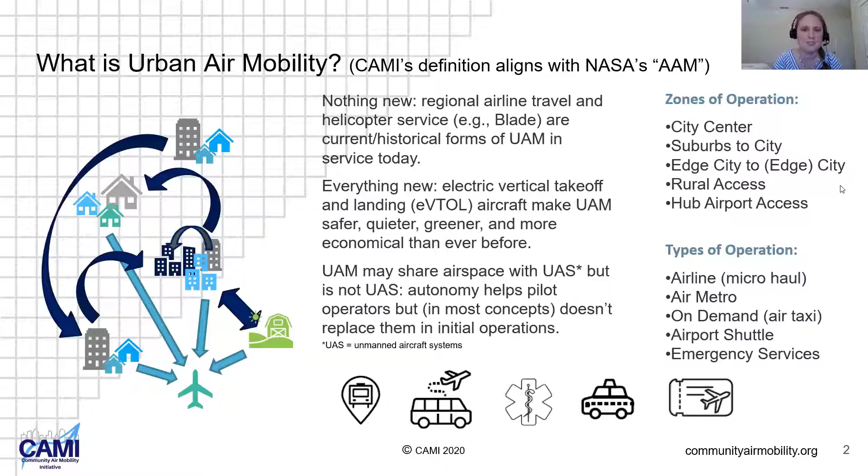So why is this different? Well, today's aviation industry operates separately from other forms of transportation. Back in the day when we could go places, we were very familiar with arriving at an airport, exiting your ground transportation, and entering this whole separate system. You're either on the other side of security or on the other side of the fence. You're definitely not integrated into the transportation networks we have available on a daily basis. Ground traffic is restricted, controlled, something apart.

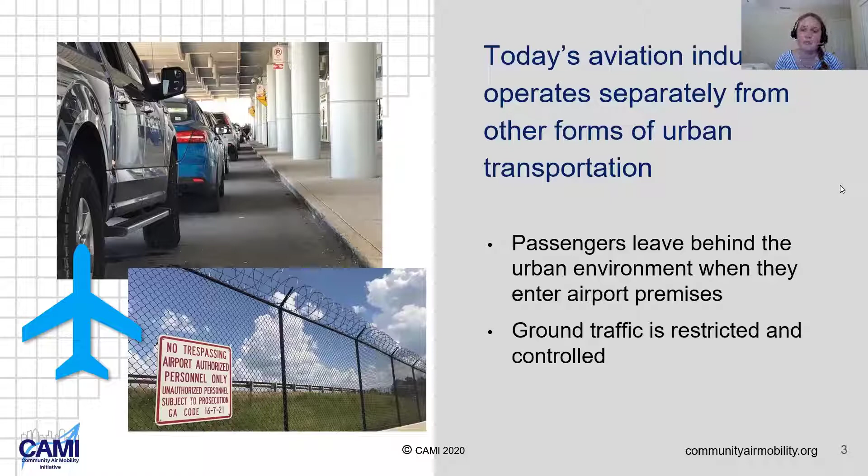Urban air mobility is turning that concept on its head. It's saying we want to take aviation, take that third dimension, and integrate it into our daily transportation needs. We want that as a solution we can use on a regular basis to get places we regularly go. This means we also have to figure out how to integrate it into the challenges we face in those other modes of transportation - congestion, urban sprawl, environmental impacts, noise - all of those things have to be addressed, and addressed well and proactively.

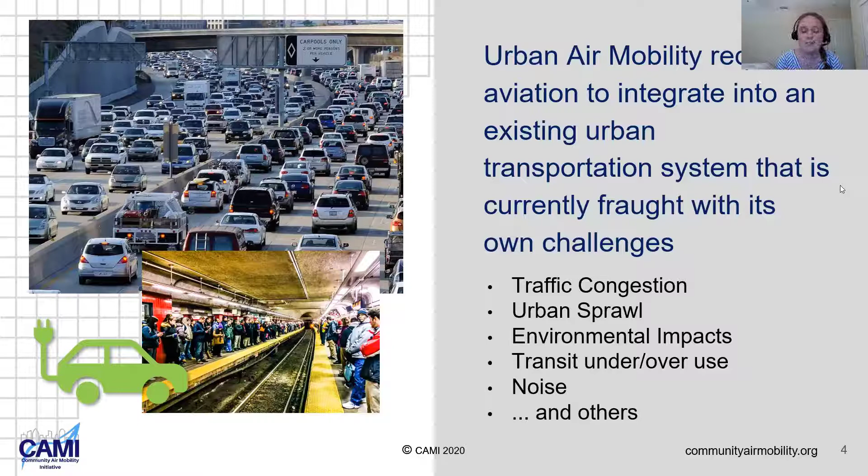Ideally, we would be integrating this new transportation technique into the existing transit systems that we've already invested in as communities. To do this requires bringing in a group of folks into the conversation that have not yet really been part of it, and I think that's probably a shame. So we've got the federal level, we've got the FAA, but we really need to focus at the state and local level.

We need to support DOTs, we need to support municipalities, and these are the folks that CAMI was created a year ago to help educate and empower as they think about how urban air mobility might impact their cities. There are other organizations at that federal level, but CAMI is really focused at the state and local level, helping with those specific integration questions.

So if we're going to be expecting this to be part of our nominal integrated transportation landscape going forward, the public, the traveling public, needs to be part of that conversation. And their acceptance, the acceptance of the general traveling public and the general not traveling public, is not guaranteed.

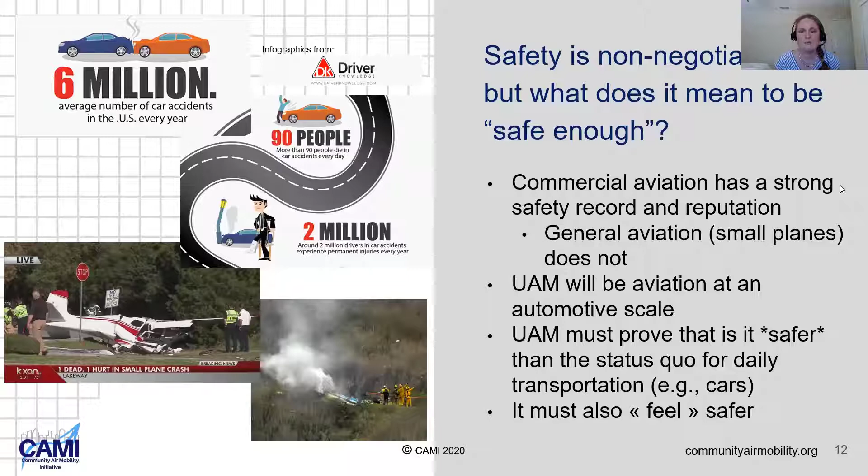That's a little bit more of a nebulous concept when you're interacting with the traveling public. The look and the feel and the aesthetics and the intangibles of the whole system will really matter for that as well.

Moving very quickly here into public benefit - this has to be strong enough that it can make it worth any amount of adverse impact. Some of the ways that urban air mobility is expected to benefit the public may be obvious with transportation. Some of them may be less obvious.

I think we'll end up reducing the need for vehicle traffic within the urban core. We could potentially eliminate transportation deserts with a very low capital infrastructure investment. There's workforce development opportunities. There's a possibility of pairing UAM with existing transit, like with a light rail system, to provide an opportunity to get home quickly, not on the schedule that the train is running, if you have to.

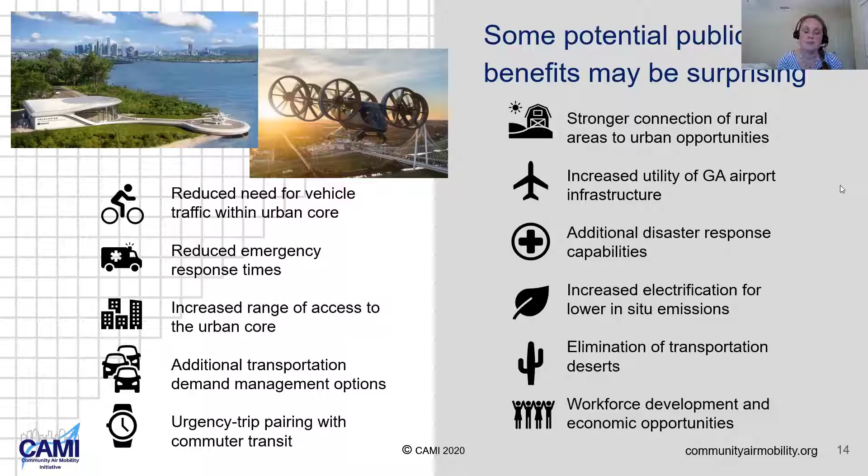Many other things that aren't traditionally part of the conversation. So we're trying to raise awareness of all of these things and amplify the potential for UAM to have as big of a positive benefit as possible.

Again, moving through our circle here, integration is going to be key. This is addressing that first slide - we're not going to be entering a separate space for aviation. We're going to be trying to do the third dimension on a daily basis, tightly coordinated with how we get places today.

So what does that mean? That means connecting with existing subways, existing light rails, being cognizant of curb space usage. If you have a bus lane at the base of your vertiport building, that could be a problem. We want to be keeping charging infrastructure in mind. We want to be keeping accessibility in mind. And we want to use zoning advantageously.

We want to use, if there's opportunities of multi-purposing the electrical infrastructure that would be part of a vertiport for ground transportation or microgrid power management for the community, we want to be doing those things. So integrating this as tightly as we can to really squeeze every drop of benefit out of it for the communities in which it's operating.

And not to cause unintentionally some additional negative impacts, moving congestion, say, instead of eliminating it, or taking ridership away from environmentally friendly public mass transit, or conversely feeding a mass transit system that's already at capacity to where now there's too many people trying to use the subway. So all of these pieces have to be considered as a holistic view of transportation within the entire urban environment.

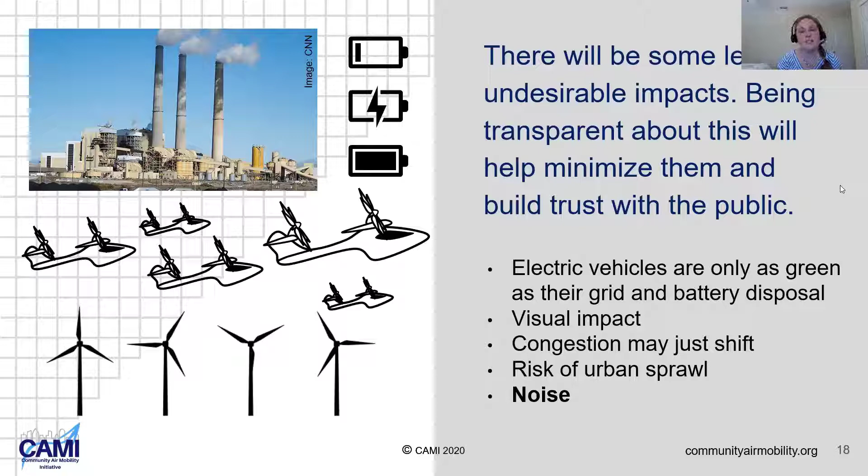And I think we can mitigate that if we're smart about it, if we get ahead of it with zoning and other land use tools. So we want to be cognizant that there could be these adverse impacts. And of course, noise is necessary to the overall success of this industry, but our position is that it's just not sufficient. Getting noise right, having quiet aircraft is certainly necessary, but it's just not sufficient to the overall acceptance and integration of UAM. With that, I'll wrap up, and either myself or Yolanda can answer questions about CAMI. Again, really appreciate the interest and support, please check us out online and reach out if you have questions or are interested in supporting our activities.

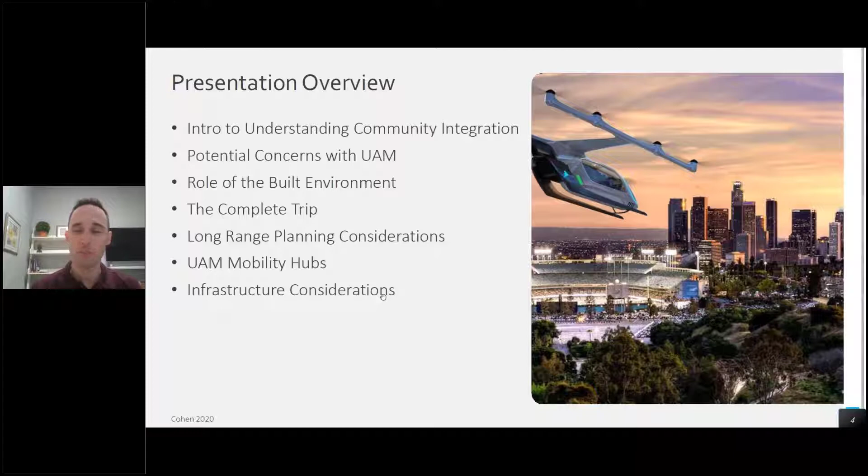One of the things I think is really important to understand with community integration, to set the stage for this conversation, is that aviation has been, for lack of a better word, very much stovepiped from the rest of the transportation ecosystem. A lot of the interactions that communities have are generally the communities around the airports or around approach paths of busy airports. And traditionally, those stakeholders have been quite different from those of local communities. At the local community level, these key stakeholders can include politicians and elected officials, city managers, urban planners, transportation engineers, public transit, disadvantaged communities, and many others. And really what UAM as well as UAS does is, by decentralizing the impacts of aviation services, it expands that footprint of potential impacts on local communities and the need for coordination and collaboration between those two groups.

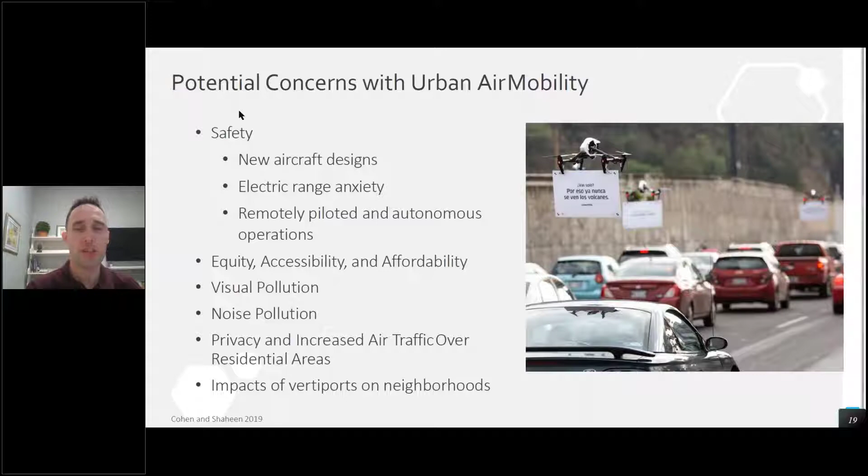Next slide. So one of the things we did—our team co-authored the Booz Allen Hamilton NASA UAM market study, and our team led the study of the impacts of potential societal barriers. It's important to understand that as part of this research, it's hard to survey or even discuss in focus groups the impacts of UAM and get accurate responses, really because the public doesn't have interaction or experience with these novel aircraft. However, these are early indicators for things to possibly watch for.

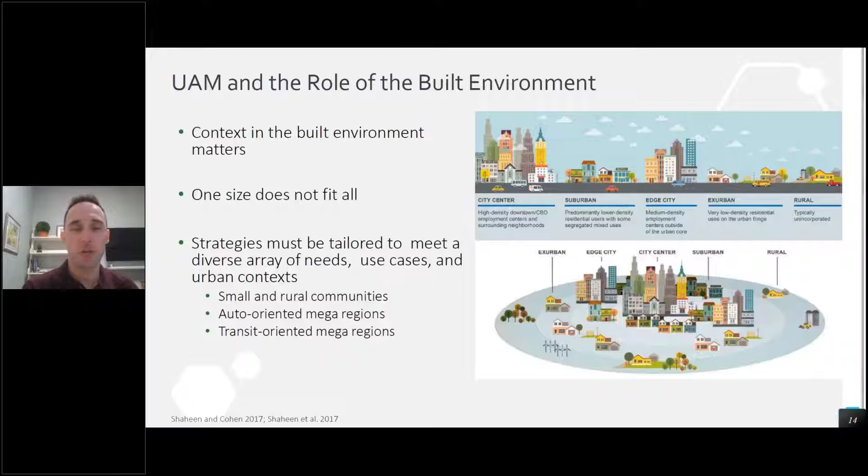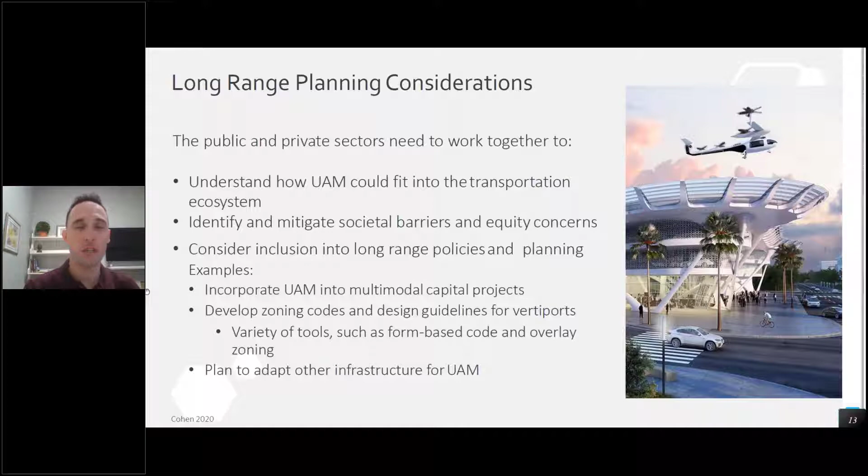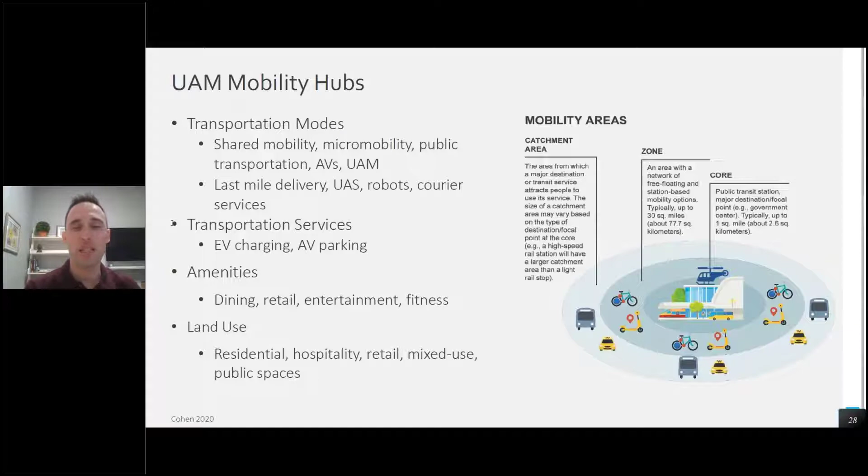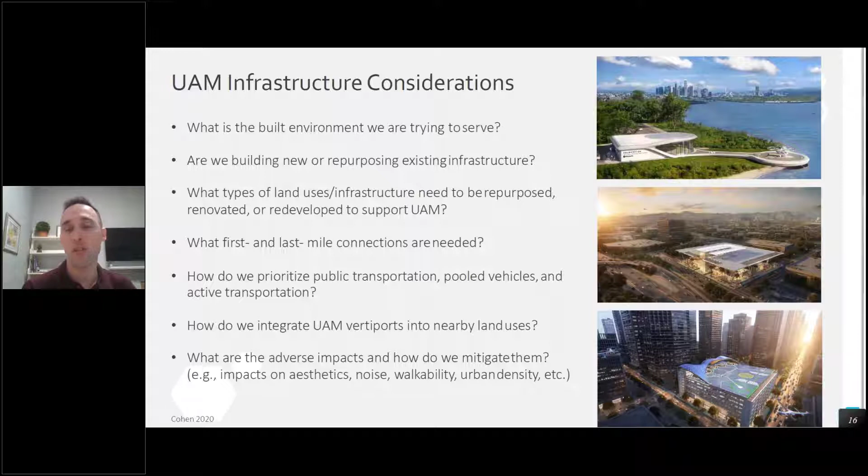What are going to be the first and last mile connections to vertiports? How do we prioritize public transit, pooled vehicles, and active transportation for access to UAM? How do we integrate it into nearby land uses? And how do we understand, identify, and mitigate all of the potential adverse impacts, everything from aesthetics, noise, walkability, urban density, and numerous others?

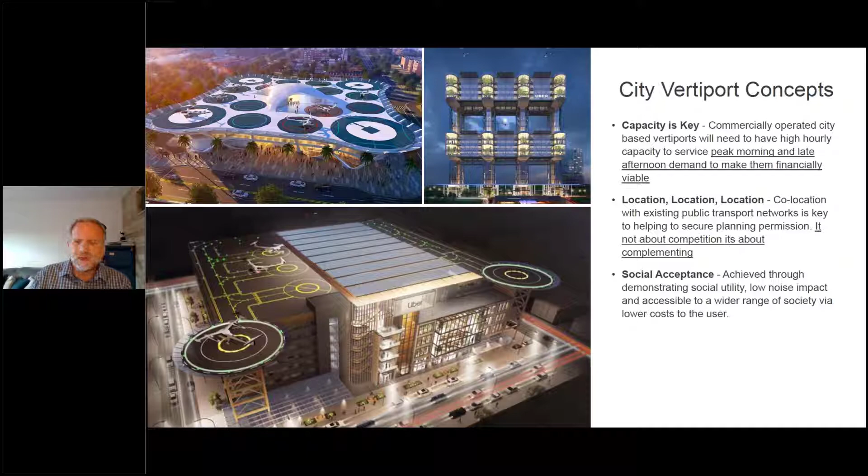And of course, that means location is paramount, but the location has to work with that public transport—it's not about competition, it's about complementing. That really drives this requirement for social acceptance, which both Adam and Anna talked about. One of the other organizations I'm supporting is CAMI, as one of the advisors there. Next slide, please.

So just taking some examples from the Uber Elevate concept. In 2018, here's a couple of my favorite concepts, put up in the top left.

A very good concept in terms of a vertiport, but what we're seeing is that this is starting to drive up the requirements for curbside drop-off and pickup, and that's actually quite a significant area of study for airport planners. We really have to understand the modal split in how passengers access airports. The recent trend is that cities and airports are trying to push people onto public modes of transport to access it, because airports are finding they're having to pay for the base infrastructure to provide road transport to those facilities.

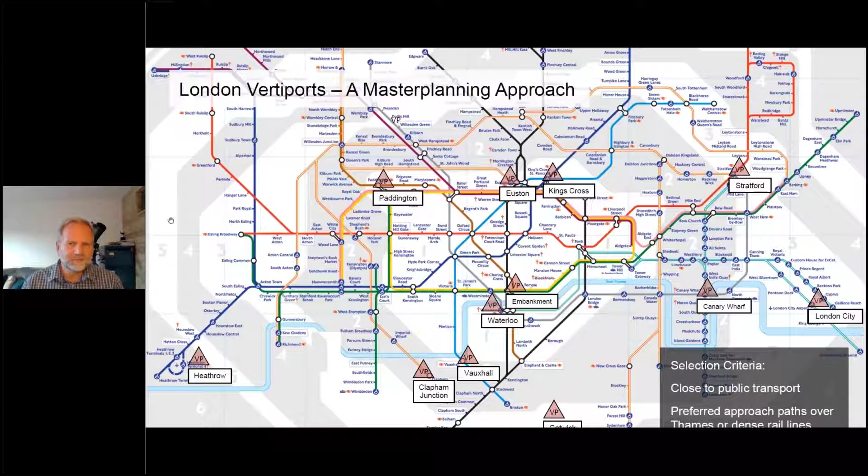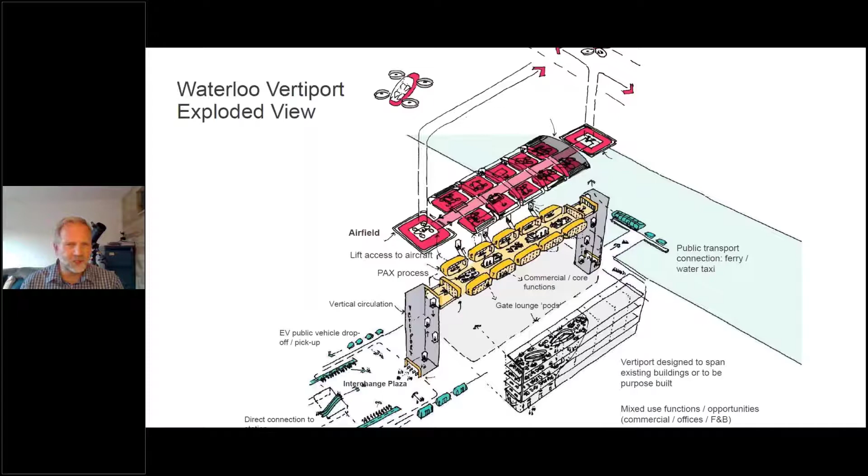Next, please. So again, what we're really trying to do is develop the facility around this interchange plaza, and we're calling it a sustainable multimodal transport hub.

So we have coaches and hopefully taxis, but not as much taxi operations as you would normally expect. We have the water taxi, water bus type operations, trams, as Waterloo Station is next to it. We have the heavy rail and the light rail, which we will be able to access, and of course all the micro mobility modes of transportation.

So as Adam was pointing out, the UAM mobility hubs, I'm actually referring to that as something called a vertiport city. And the question is, how will vertiports like this start to affect the local community around there, and what planning laws and regulations can be put in place to make the best use of that. This is, of course, in reference to the Airport City concept by John Kasarda.

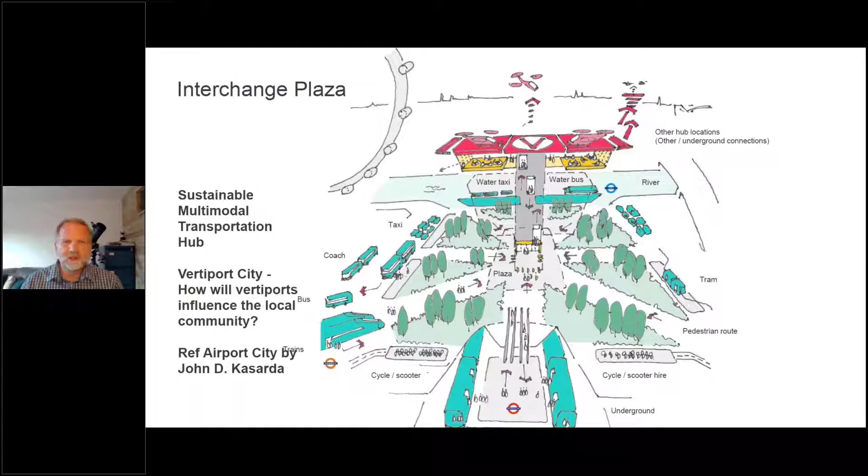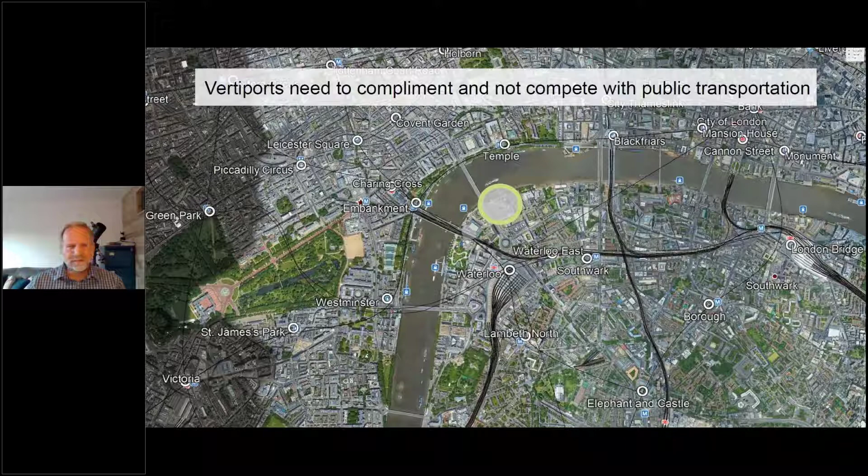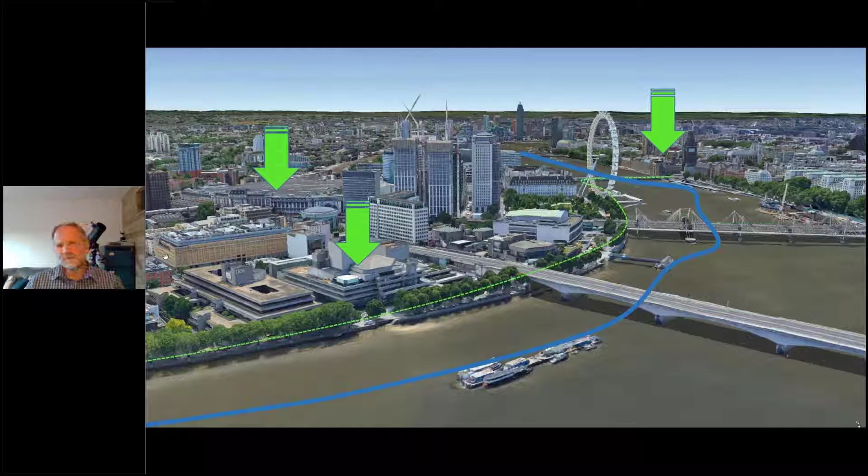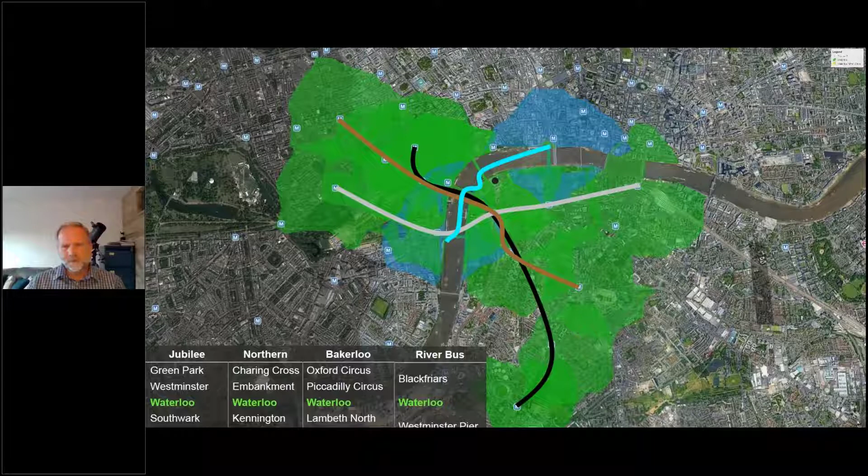Again, this illustrates the power of using the public transportation system to get to where you're trying to go, rather than relying on taxi journeys. Next.

The interesting thing is what the impact is on the existing rail system. If you were to come in from the north of London, say into King's Cross or St. Pancras Station, you would jump on the underground and come south through the underground system. For those people able to access the Waterloo vertiport, you'd be taking them out of that proportion of the journey, dropping them at Waterloo vertiport and allowing them to access without getting into the public transport system at all - or if they do have to access it, that journey would be much shorter. So there's potential to help alleviate some level of congestion, but we have to be clear - it's not going to be huge volumes of travel that you're able to take out of it.